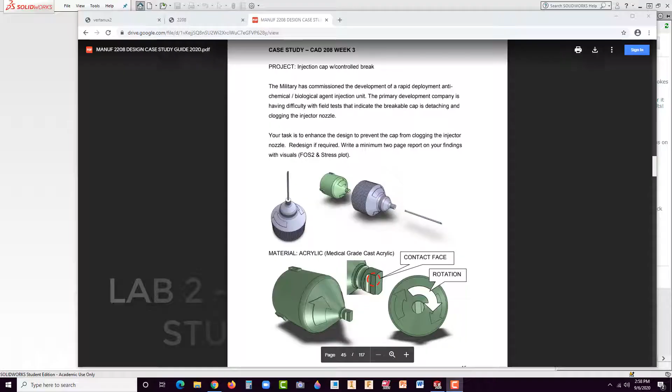Now here, what you see, it's this injector cap with controlled break. And what it is, the military has commissioned development of a rapid deployment anti-chemical/biological agent injection unit. It's kind of like an EpiPen, basically. Now, the primary development companies have a difficulty with field tests that indicate the breakable cap is detaching and clogging the injector nozzle.

That is this part right here. So basically, as it twists, imagine if you were to try and twist that like twisting a knob on a stove. You want to rotate it just like you see here to enable this to break off, and then fluid could get through this little area here. This has a cap on it, just like an injector needle here. Actually, it is a needle, and it lets the fluid flow through. Now what was happening is this little cap here breaks off, and then it clogs inside this unit, clogging the orifice, so the fluids can't flow through, and you can't have that out in the field, all right?

So this is actually based off of a real case study. I changed the parts and the application a bit, so it's different, but it was one that I ran through, and it was really cool, the solution we came up with. All right, so anyhow, let's get started.

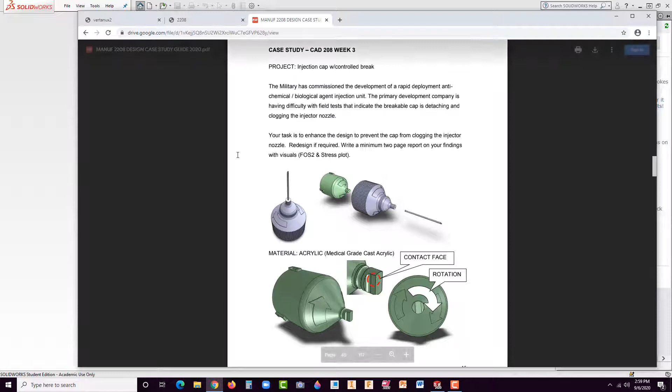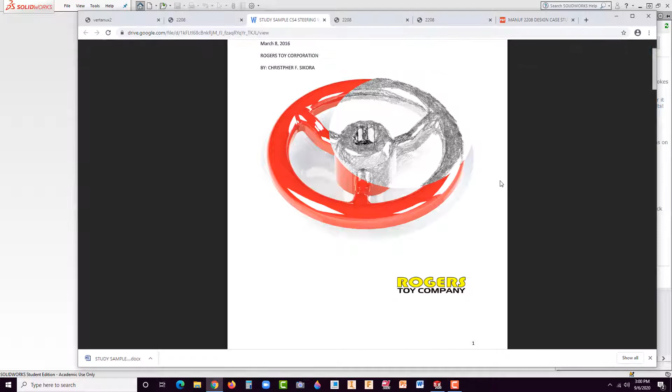All right, and now let's go back here to the 2208, and you'll see Lab 2. That's the files that we want, so go ahead and click on Lab 2, hit Download, and you'll see the injector. Just click on that, and right-click on that folder, and cut it out. I'm going to just drop it on my desktop. Right-click on the desktop, and paste. And now, if we go to the desktop, we'll see the injector, and here are all the parts.

Now, I give you more parts than you really need. Part of doing case studies is to understand what you need and what you don't need. And you don't want to do more work than you have to, all right? Especially when you're doing analysis. So they want us to analyze this and come up with a solution that we're pretty darn sure that's going to work, because this has already been molded and made.

And we want to find the most inexpensive way to fix this design flaw. So you see, injector breakaway head, that's the actual part that we need to modify, and that is the only part you are to modify.

If you really want to change the whole design, you could go ahead, but remember, this is a fictitious design. It's not the original one, so it's not real. It doesn't work like the real part would. So I don't want you really tampering with that. And that's when you go into industry, you have to know to do that too. You don't want to change a customer's entire design, right? You'll get in trouble for that, unless you have to. I mean, if there's really no other way around it, but you have to do some convincing of that, okay? You have to prove out that their design isn't going to work.

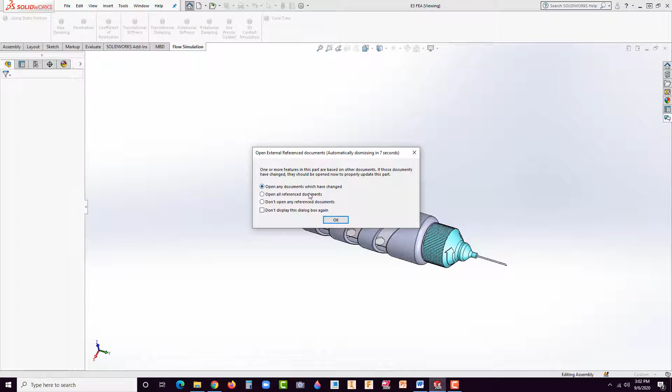All right, but anyway, we'll grab the whole E3 FEA. You can just double click on it. It should launch inside SolidWorks here. And let's see, any changes, just go ahead and hit OK.

And I'm using SolidWorks 2020, by the way.

All right, so here we have, you see it says twist before injection. So this thing twists, but this isn't the part we're editing. But let's go up here and let's do a cross section and see what's going on the inside.

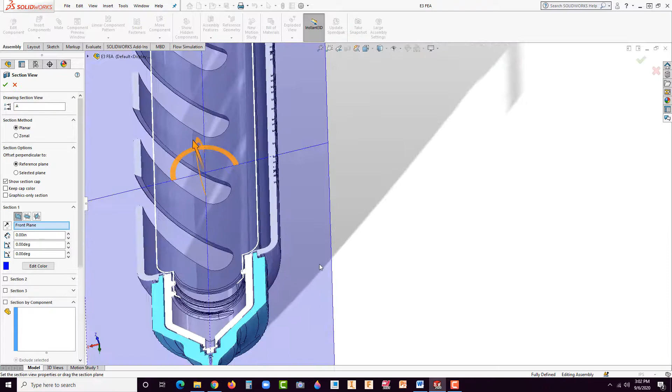As we do the cross section, we could actually see this is the breakaway head. See how this gets really thin here? That's the intent—the design intent is so that it severs and breaks. And then the fluid is in here, and it just makes its way through, able to get through the needle and into the recipient.

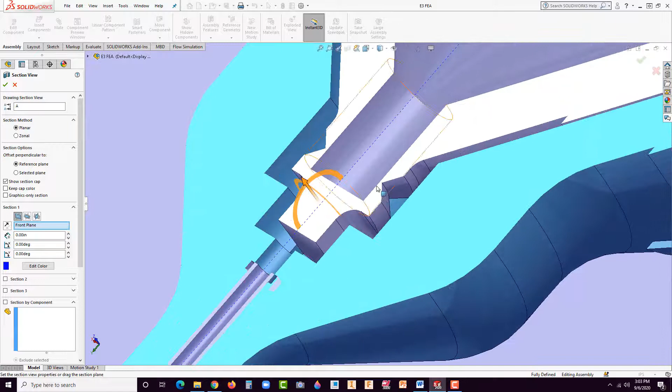All right, now it can't fail. And what was happening is that this head here, even though clearance was designed in, or what they thought was clearance, it was actually twisting or something was happening where maybe it moved forward and basically closed off the whole area, so it couldn't actually make it through.

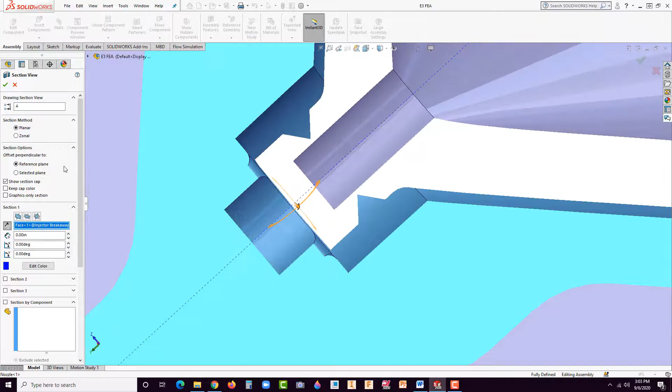So I'm going to cancel out of there. What we can do is we'll hide this—just click on this and hide it. And here you could see there's the actual needle and here's this part.

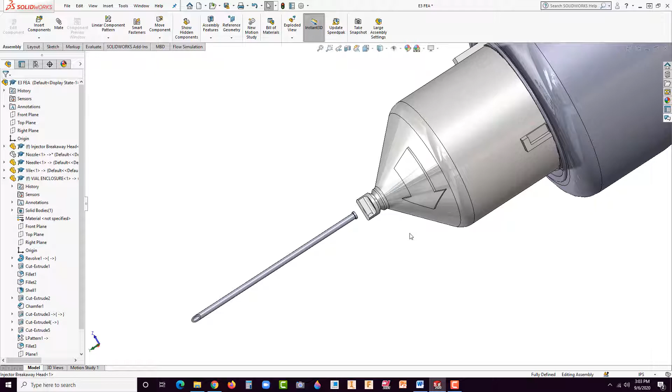Later on we could test it if we want. But we saw we have a very limited area inside there to work with. And we only want, like I said, you want to try and save money, so let's just figure on fixing this part right here.

So let's open that up. Let's right click on it, open.

All right, now I've already put in some features. I did cuts right here. And the very first exercise in the book, which I don't usually go through, I'll let you look at it—it's a split face, and it shows you how to make split faces.

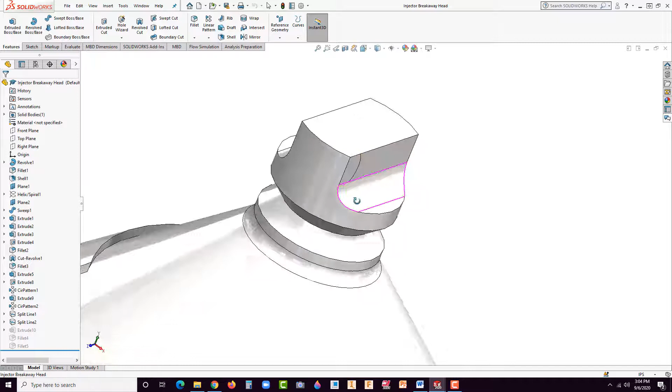And the reason I made split faces here and here is so that you can simulate the twisting effect. Imagine if your finger and your thumb—your finger went right here and your thumb went here—you could actually twist it. See the arrows?

Those arrows are put in there specifically for this lesson. So in real life, those wouldn't be there. Just be aware, I just put those in so I could explain it better. So that gets twisted off.

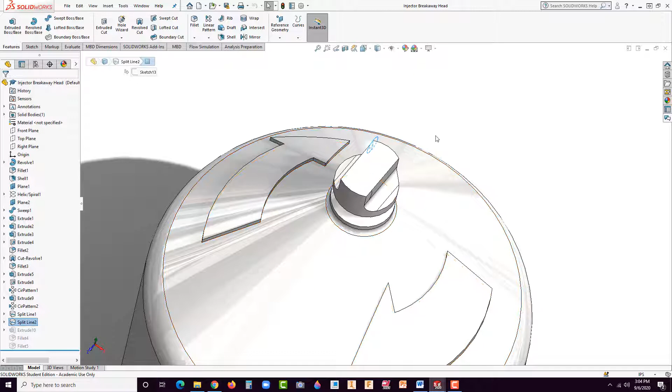But let's try and simulate this. Now remember, we're using the low-level simulation, the free one that comes in every license. All right, so go to SolidWorks add-ins and make sure SolidWorks Simulation is turned off. All right, if it's not there, that's good.

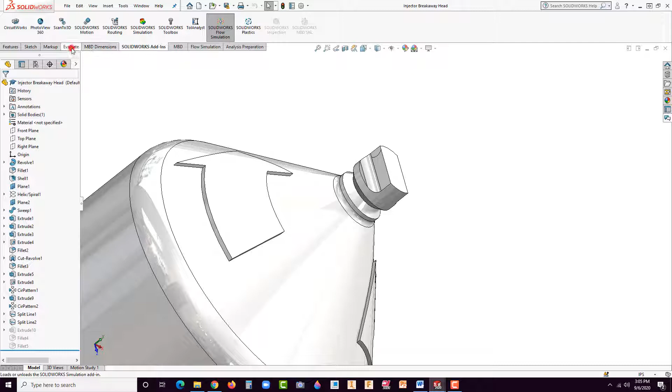Okay, that's fine. Now what you want to do is you want to go to Evaluate and find the SimulationXpress Analysis Wizard. Select it. Now,

over here, see Options, click on Options, make sure it's set to SI and hit OK. Down below, we're going to go ahead, we want to see megapascals, as we did before, so make sure it's set to mmgs.

Sometimes I actually go back to Options—it's weird if you don't. I've seen it come up in PSI, and I don't want PSI in your results. If you give it to me in PSI, I'm going to send it back to you. All right, so hit Next.

And so we can see here the material is already selected, but we'll find out what that is. I'm not sure what that was in there. Actually, it says it's not specified here, but we'll see what's going on.

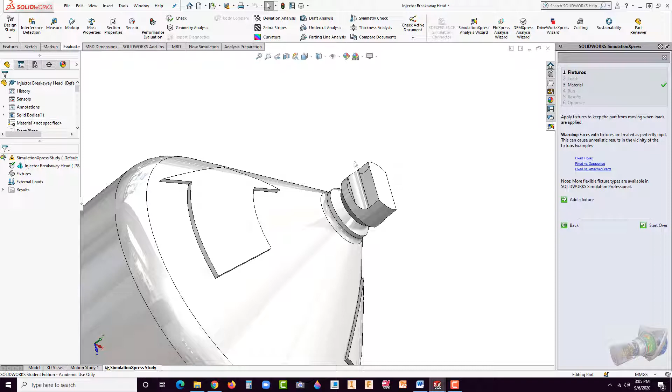All right, so let's first of all add a fixture. Now the fixtures, we could actually make the base here the fixture.

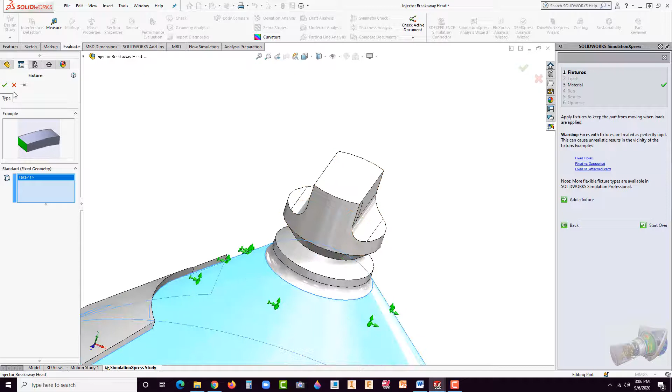So select this face right here. That's what we're considering the immovable object. It could be this too, either way is fine. But we want to really see this get severed. So let's go ahead and hit the green check so that there we have our fixed face.

Now we'll hit Next. Now we have add force and pressure. Now you're probably thinking, hey, wait, this is a torque analysis. Some of you might realize that.

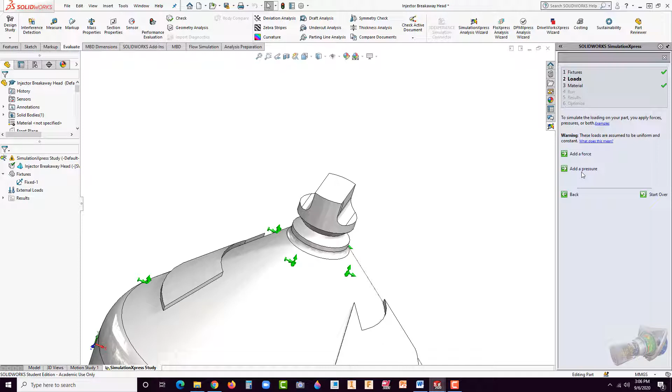It is technically a torque analysis, and we will revisit this in a few weeks using the actual torque tools. One reason I have this is just to show we're going to use the low-level version here, and we're going to apply force on both of those faces that I broke. And we'll get somewhat of an effect of torque here. And I've run it through both, and it actually comes up pretty darn accurate.

So go to Add Force, and instead of SI, newtons, change it to English IPS. Set it to—usually I put it in the case study—so let's go ahead and put in 20 pounds of force.

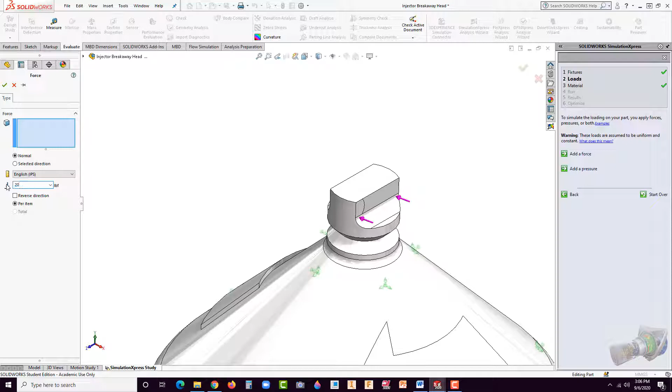And now select this little face here, rotate around, and select that little face there. And look at that, see the arrows? The direction? So the idea is it's like twisting on those faces, just like a knob on a washing machine or a knob on a stove, you're turning it, okay?

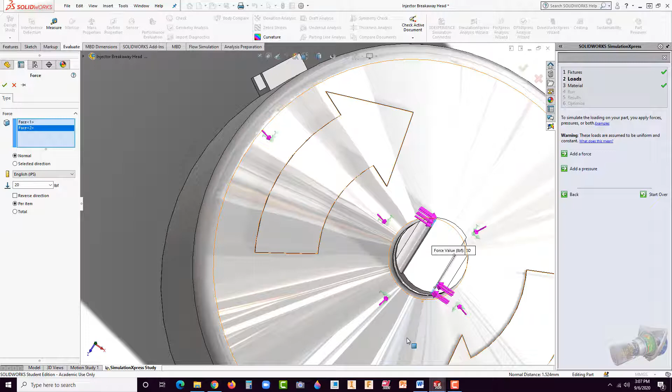And the goal is it's going to sever that thin area and break it so that the fluid can flow out. Hit the green check. Let's go ahead and hit Next. Now, it is already set to acrylic.

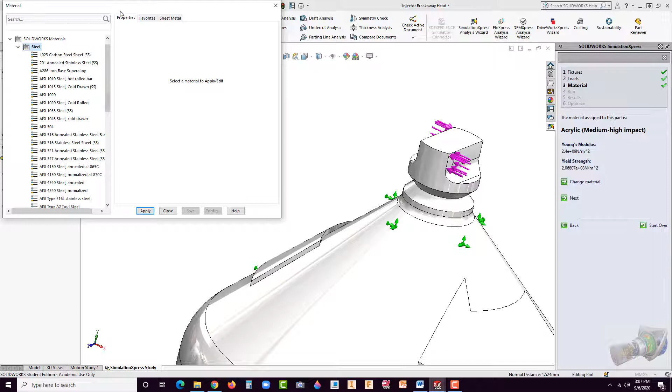I'm going to hit Change Material just to make sure, this might be an older material that no longer exists. Let's go over here, hit the arrow, find plastics, and go with acrylic. The yield is at 45. If you change this to megapascals, or MPa, there it is, 45 is our yield strength.

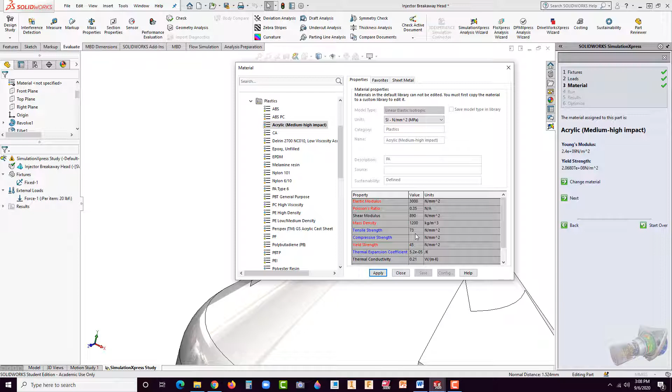So at that point, it's not necessarily breaking, it could be getting really close there. Tensile is actually up to 73, that's technically where we would probably see the actual fracture occur. But yield is at 45. Let's hit Apply and Close.

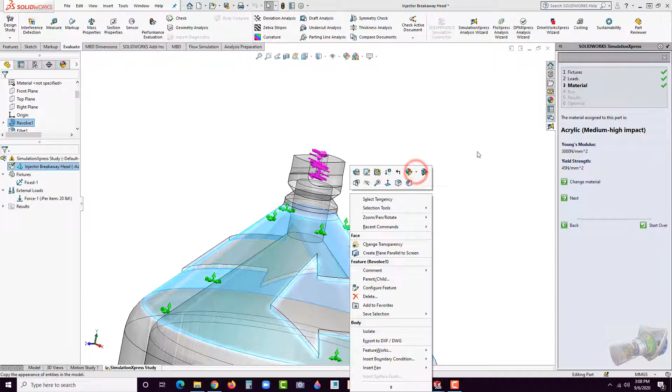Now it turns it to transparency, which is kind of helpful. You can actually see the cutout there and how thin it gets. So the idea was designed to actually sever that area. We could leave it clear, but if you don't like it transparent, you could right click and go to change transparency and turn it off, or select a different material from the list for the appearance, which won't override the actual acrylic material we selected. But we could probably leave it like this and it's fine.

You'll also see some other features, like threads, that take up a tremendous amount of resources on a computer. You might want to right click on those and suppress them.

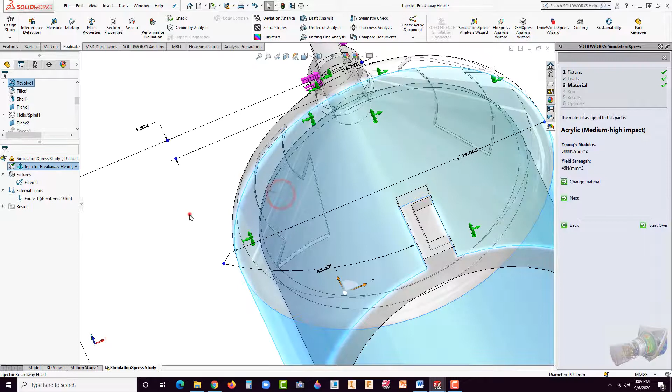Also, if you can't select the surface, try holding shift on your keyboard. Holding shift will allow you to select the outer surfaces here. It's not working for me, why not? Oh, there's a control... nope. Okay, never mind that, let's cancel that.

All right, we should be okay leaving those in. But in real life, you might want to take them off. We could probably find them on the tree and suppress them, but I know it works with them on there, so it doesn't really matter.

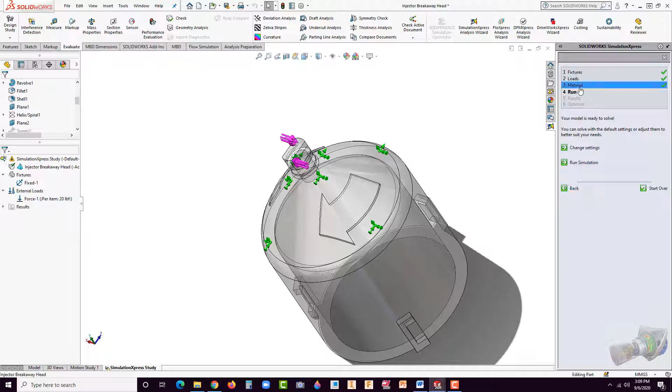Let's go ahead and hit next, and now the only option is run. Hit run simulation, now it's going to break this down into a collection of triangles. This is where it looks a little strange, you see the exaggeration of it, what looks like stretching. Let's go ahead and hit yes, continue.

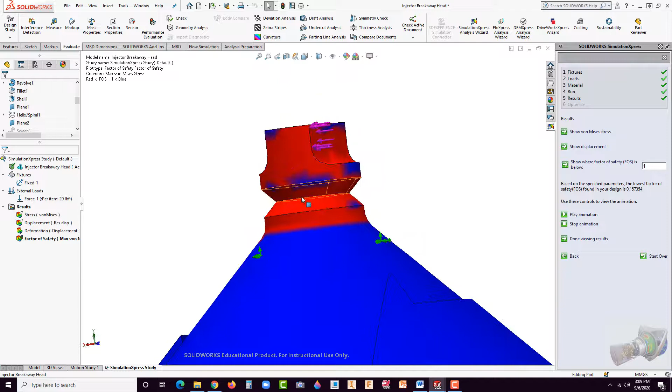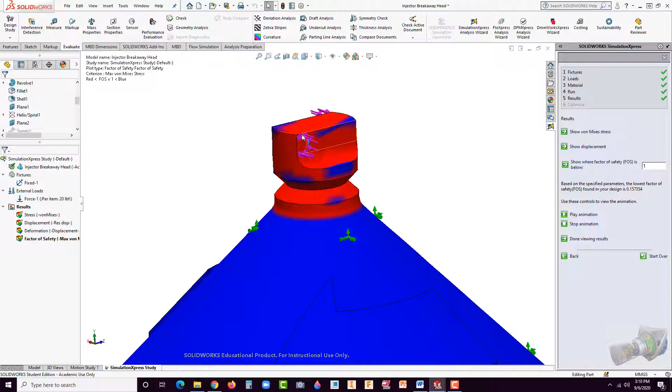Now we can see a factor of safety of 1. We can see the red is clearly there, and the red tells us that it's beyond its yield. But this is binary, so it's like fail or not fail. It's definitely failing, we don't know which area is failing first, but the clue, as I've talked about before, is when you see the marbleized blue, that's usually pretty safe to say it's okay. Here we see red go all the way through. We can't really see a cross-section, but you can see the red inside there as well.

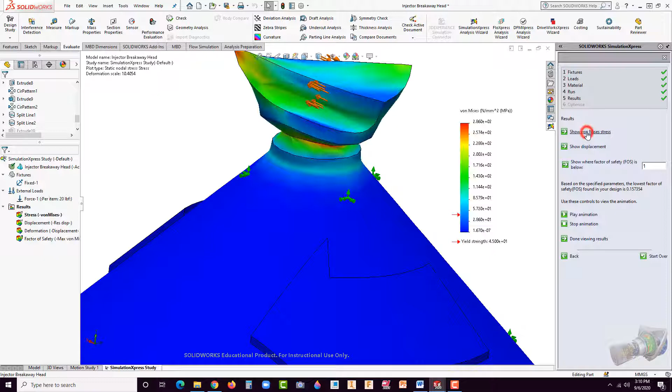Now let's change it to stress, show von Mises. Now here we can see, in megapascals, the yield strength, because it's coming up with scientific notation, it's 4.5, but remember it's really 45. So right here is where we're experiencing it, anything above the blue is hitting yield, going past it.

And what we saw was the tensile strength, we could use that to our advantage too. Tensile, remember, was 71, I believe, and so 71 is right about here. So anything above that is fracturing, and we could see the red, that would be the first area.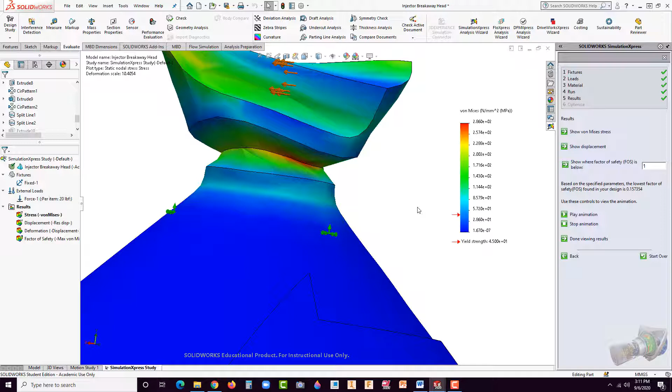So we're good to go, it actually is failing and breaking off, so we want to make sure that part is functional. 20 pounds of force might be a bit excessive too, we might actually only want to do 10, now that I think about it, I might have put the wrong one in there. But we're getting the results we're hoping for, we don't see any red up at the top, we just see it around that area.

So that's good. Okay, show displacement. We learned about this, basically how much is it moving by, and we can see metric here.

Move the decimal place. We're moving about -1, so that's moving less than a millimeter according to that. But this one's kind of awkward because we're not truly using the torque analysis.

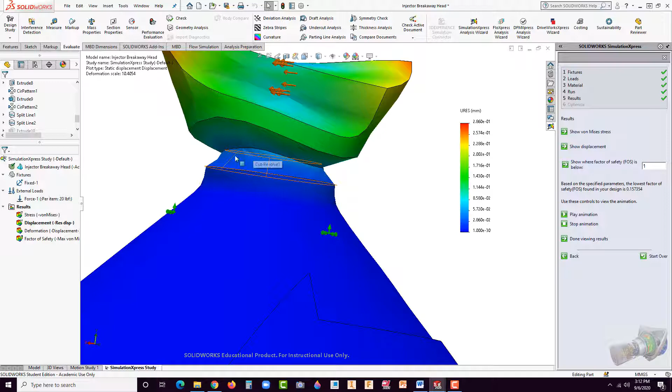What we're interested in though is this severing. Okay, now that we have that, we could actually start taking some images of this. Let's go back to show factor of safety, and we can now take a picture of that. Let's zoom up on it.

And sometimes, see this little box up here? Sometimes I like to have this close in proximity to it, because this is kind of the evidence, so you have a backup of what's going on, like what the factor of safety is. Because if you just sever out the images and crop them, you don't know. So while we have that close in proximity, I just dragged it over.

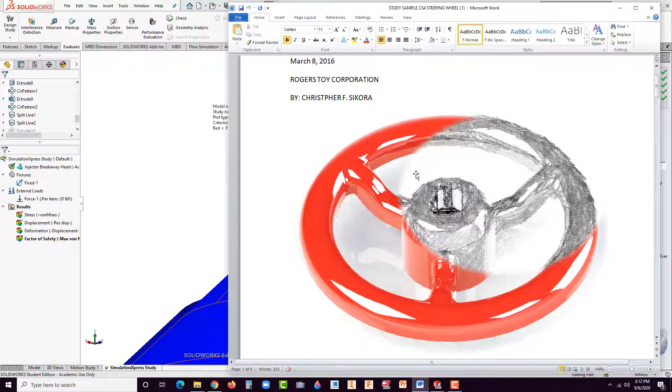It's a little tricky to drag, but now you could hit Alt print screen. And let's go to our Word document that we opened up earlier. Let's zoom out here a little bit and go to 100%. We'll get rid of that image soon here.

First one here, let's see, do we have a factor of safety in here? I actually don't, so we'll make this first one. Steering wheel—actually, it's not the steering wheel, of course. This is the injector break away.

And we'll put in FOS, factor of safety 1. Let's put in a little dash there. All right, and just make sure you put in the date.

All right, now the result: the injector cap appears to break within our yield limit.

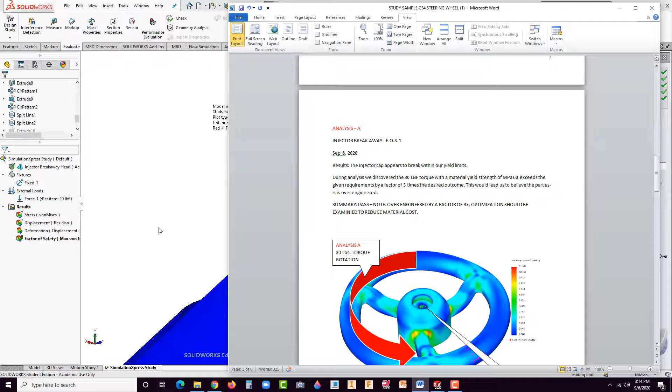Okay, so now that we have that, oh, and actually, you know what, we need to actually test it with the modification. So we really don't need this just yet.

Let's go back down here, go to model, right? At least we have it set up so we could rerun it once we make the change. Now here's the thing—you can make a sketch pad and come up with some hand sketches on what you want to do as far as different concepts. I've seen probably a dozen different concepts over the years teaching this on how to correct this design so we don't want this cap flying off easily or getting lodged into that area like we saw earlier in the assembly. So we need some way to hold it down or keep it away from there.

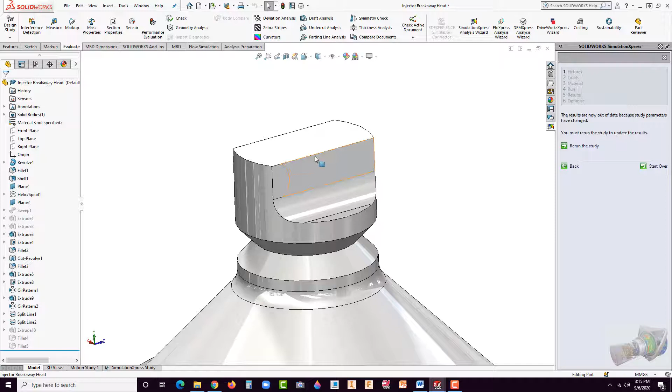Now what I've had is students go in here and draw little bosses so it can't go too far away. But when they take the measurements, I've seen students not measure correctly when you go to the assembly. So let me show you what I mean—let's go back over here and bring in the nozzle, show it, let's go to section.

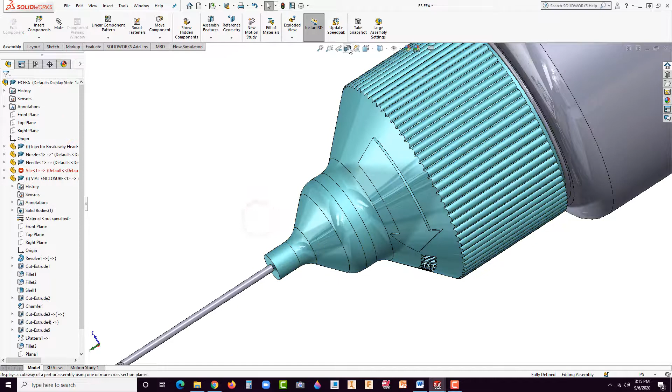Okay, so I've had students right here put in little posts and leave a very small amount, but the problem is if you measure this, there's very little room in there to begin with. Remember, this is really a small part. So to measure it, you go to evaluate and measure, see the little tape measure, and click from here to here. What we see is it's 60 thousandths of an inch. And I've seen people put in 30 thousandths nubs like right in here.

Let's see if we use the markup tool—maybe we could use that. Oh, markup's not available right now. Oh, there it goes.

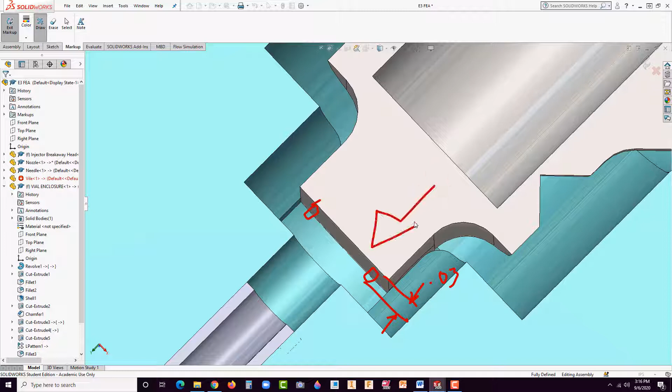So you've seen like little nubs drawn in, sometimes 4, sometimes 2, so it could teeter-totter, which really isn't a bad concept. And then they keep the distance between that at about 0.03, because remember it's 60 thousandths, so they're getting a little bit of clearance. So when this moves forward, it pushes and doesn't seal off this head.

Okay, and remember, you're not supposed to modify this or the needle. I've had students ask, nope, nope, nope. If you've really read through this and you're like, can I redesign it just for fun? If you're into that, absolutely, let me know ahead of time and I'll accept it, because otherwise I need you to focus on this.

All right, so anyways, with that in mind, I've also seen students cut out this segment right here so fluid could flow through, because remember, we're trying to get the fluid through here and around and into the needle as fast as possible.

This is a rapid deployment. Okay, 30 thousandths of an inch isn't exactly a big thing, although needles are very thin, so it's not that big of a deal. All right, so there's a couple scenarios.

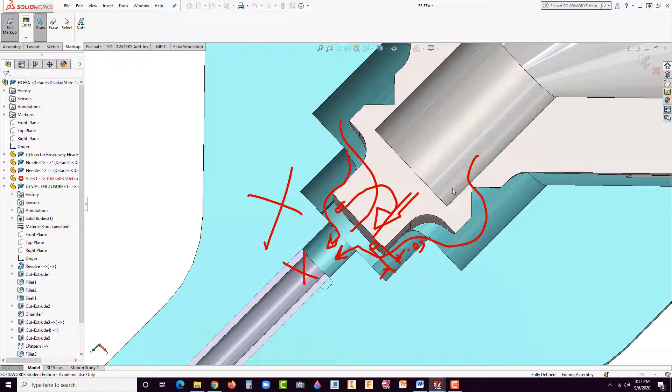Now here's what we ended up doing where I worked. We ended up, to make sure, because were we positive if we put those nubs in or those? Believe me, we thought about those ideas, but none of them felt comfortable putting them in. And you could try those, by all means, feel free to put those in.

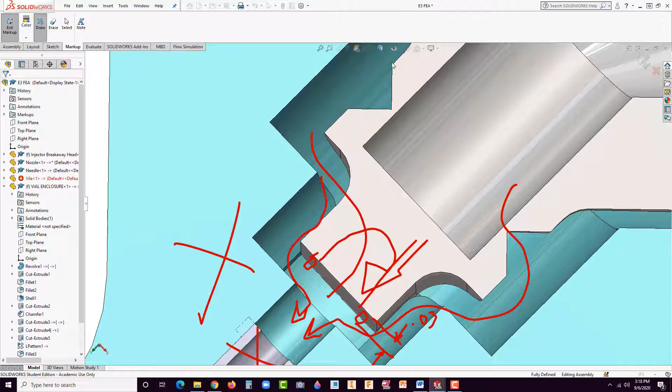You don't have to do much more analysis because that's not going to affect it. And we're not doing a fluid analysis of this either, which actually would be really cool. It's just a little bit higher level than I want to take this class.

But what we ended up doing was putting a tether. Now, a definition of a tether: when you hold a balloon that has helium in it, it rises in the air, and there's a string attached to it - that's basically a tether. So by modeling in this little area, making a tether thin enough - remember, when plastics are thin they bend a little easier versus when they're thicker and bulkier - the theory was that even though this gets twisted off, the tether would maintain its shape. You have to make sure it's small enough to fit in this area.

But the nice thing about the tether - just on one side now, I've had people do tethers on both sides, and I'm like, well then it's not going to really move much, it might actually hold it too close. But one tether is what we ended up going with. So the whole thing tilts and rotates a little bit, and all the fluid makes its way through. Without actually having to really test it in the field, we were able to just come up with that idea, and it worked.

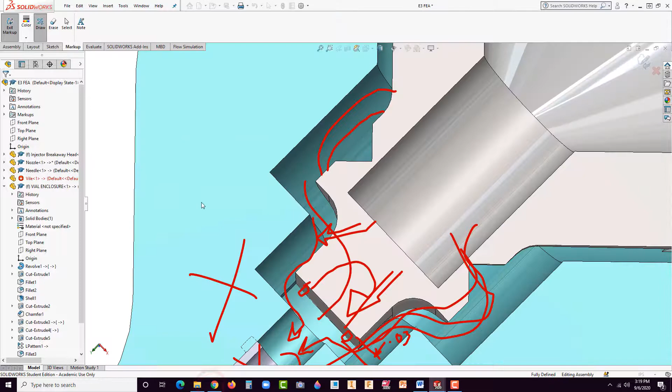So it's up to you. There's 3 different ideas right there. There's other ideas I've seen, but let me show you how you would fix that, how you would model that up. So let's go back to the part.

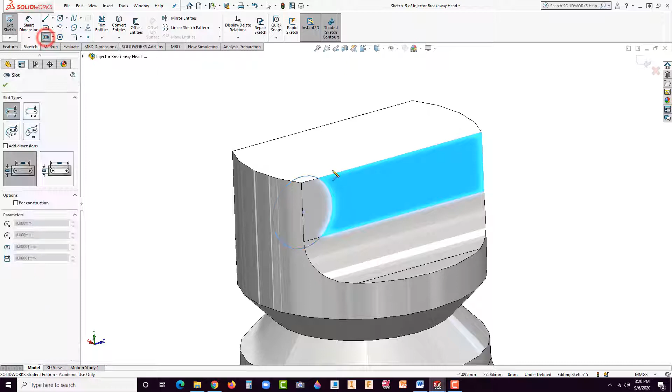Turn off markup. Okay, so Control Tab. So for those of you who wanted to make the cutout, I've seen students do this where they select this face or this face and they draw in a little box. So right here, actually this is what I see most students do - they create a sketch on the side here. And if you want, you could use this, it's kind of a neat little tool, you could do something like that. And then features, extrude cut, through all.

Now here's the problem I've seen students run into with that cutout. When they apply the force to these ends, there's so much removed here, it might actually be snapping this off versus snapping the neck. So be careful of that if you make it too big. I've seen students make it really big, I call them rabbit ears almost, they get so big. I've had students make big cutouts like, no, I want to make sure that fluid flows through there, which is good, but you've got to be careful because it might fracture, break this, or bend it. It might make it too soft where it just bends and doesn't sever the cap.

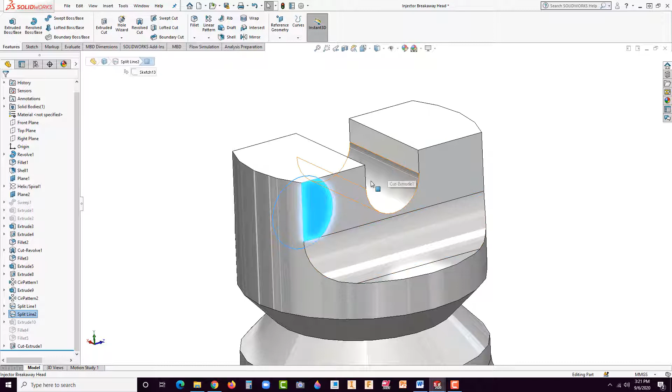So be careful of this design. This is not, to me, an acceptable design. If you want to try it, by all means, I'm not going to be critical. I'll let you know what we experienced when we did analysis, or I'll give you my thoughts. But anyhow, let's look at another one.

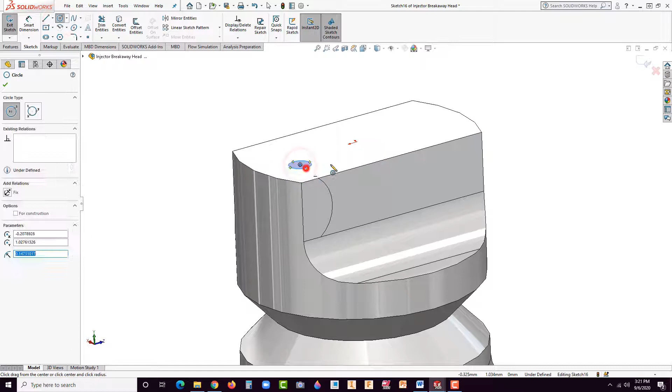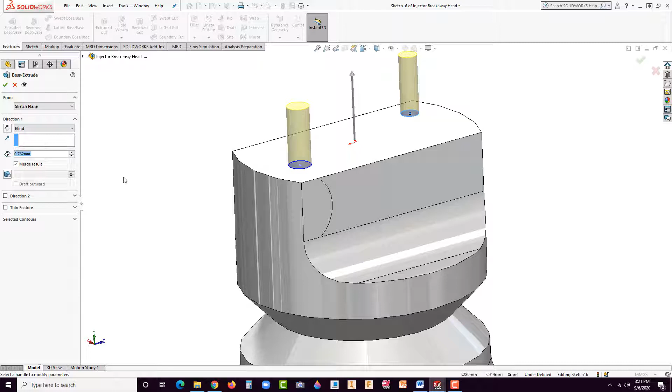Wow, that seems actually quite large. That can't be right, I must have mismeasured something. But anyhow, just be aware that I'm not comfortable at all with that one. It just doesn't seem like it makes sense to me.

When you give me your designs, I'm looking more for your report. Sell me on your idea, sell me on the concept. I'm also looking at the quality of your report, not so much the design. I'll point out some things, but I don't necessarily grade on the design, because you're still learning.

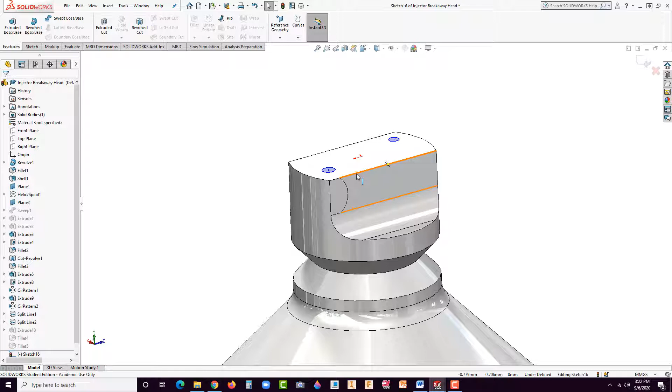I want you to try different things. I will write down where there's error, or maybe give you a second pair of eyes and say, Joe, that might not work. But I'm not going to be critical as far as grading on it. Just make sure you make a good report.

So once you make these changes, let me show you the last one. This is what we did at the company I worked at. We went with the right plane, started to sketch, went to the right view orientation, and it was just this. We took the spline tool, dug it in, and had it come through.

Again, you want to make sure you can verify it later on. Go to extrude, select that geometry. We're metric here, but that's okay, we'll do a conversion. Put in 0.01 IN, so it converts it to 0.254 millimeters.

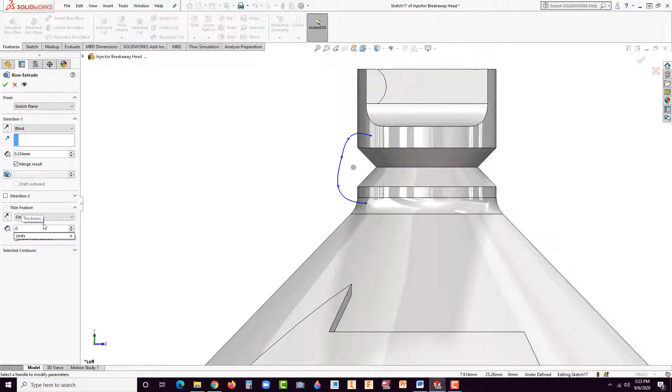Over here for the thin feature, that adds thickness. So we could put in the same 0.254. Now we can see a little tether. We might actually want to make it a little thinner, and also let's have it go mid-plane so it's centered. We'll try that - actually, that might work.

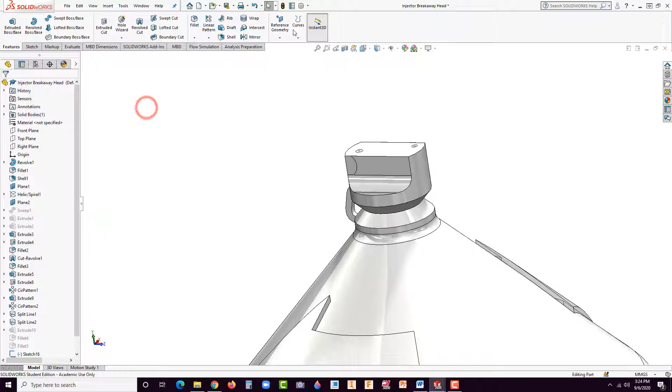Now we could go ahead and rerun the analysis. So we go down here. Once you have this, go back to Evaluate, SimulationXpress Analysis, and go to Next. It should still all be set up. Let's see here, Loads - it didn't remember, so let's go to Add Force. There, and there, and we had it.

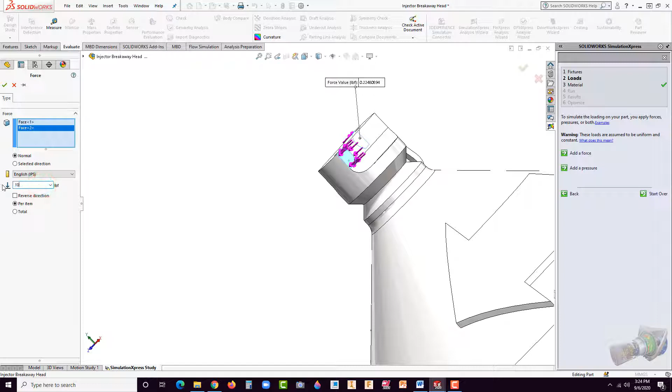Let's change to English and actually go with 10 - I think it's supposed to be more like 10 pounds. Hit the green check. The fixtures, let's add the fixture. Again, select that face there. Hit next, next, Acrylic.

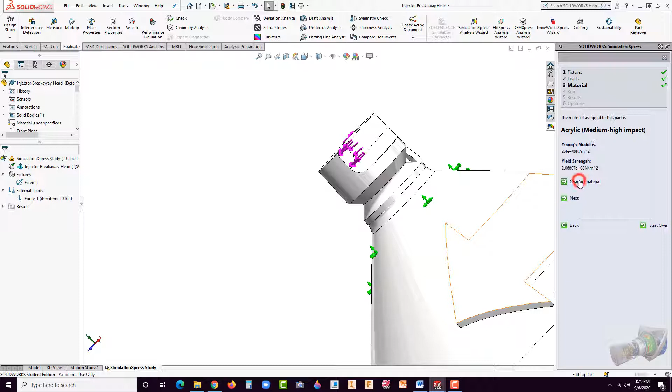I don't trust that one, I'm going to hit change. Again, let's pick that out, that's under plastics. Go with acrylic, apply, close, next, and run it. Hit yes. All right, look at that.

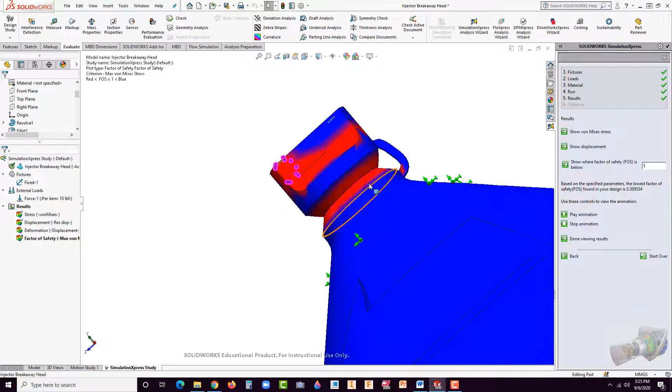And this is what's really cool - look at how it's all bright red in there. We know that's where failure is occurring. Look at this, no red, because it's so thin. So what you would do with this: get a good picture of it, Alt Print Screen, and start dropping these in. So this is the factor of safety.

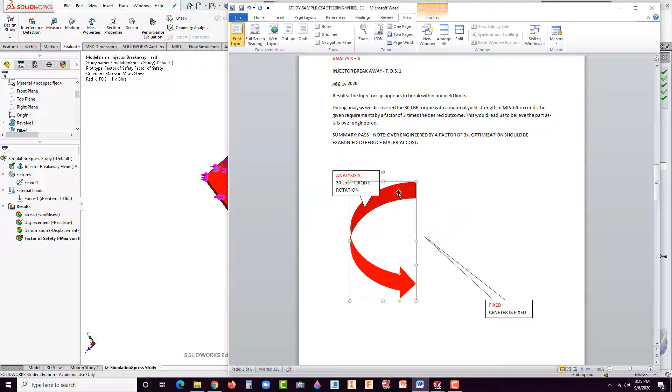Let's delete that - we could leave that in actually. Control V, put this in like so. You could rearrange the arrow if you want to do something like that to show the rotation.

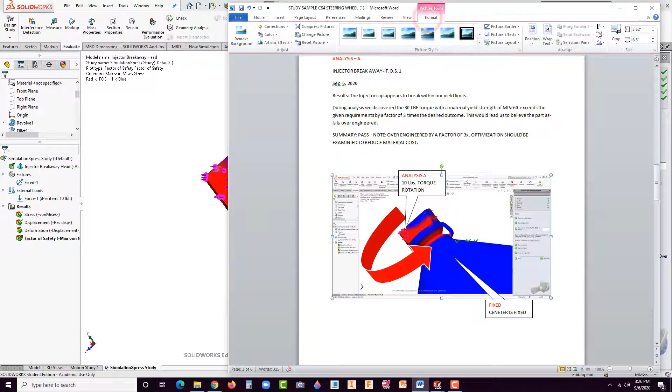And in this case, we put in 10. And fixed - this base is fixed here. And then the torque, we could put it like here. All right, so 10 pounds on there, so you could read that. Remember, there's the ability to crop. You go to Format and Crop. You can crop off this excess.

And I should have done this before I put in all that fancy stuff. Okay, let's click, make it bigger. Let's move that around. And this is still valid right there.

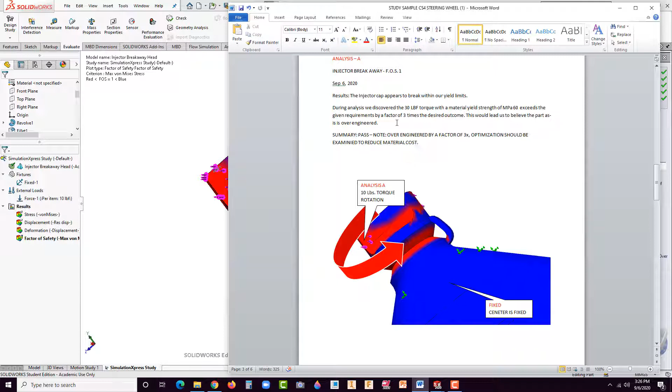That's fixed, okay, so we have that, and you'd want to go through and fix this. By the way, if you don't fix this, I will mark off on it. All right, so just be aware, if you forget to change these, it's going to be marked as wrong. So like here, this 30, make sure you change that.

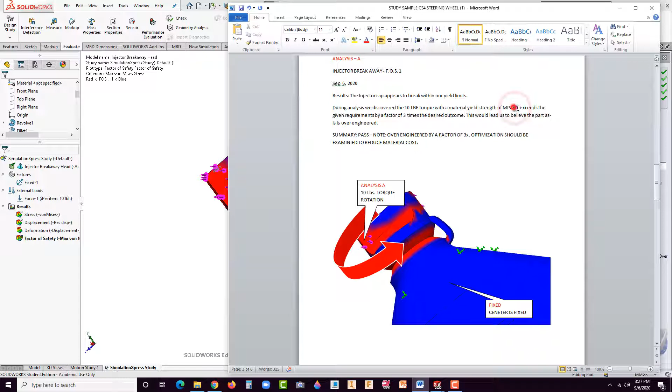Put in any changes, like the yield strength of the acrylic - remember, it's 45, it says 60, so don't forget. All those things need to be updated, and so on and so forth. Then you'd put the other images in here, and that would be it. Now, again, make sure you get a good picture to drop in here. Delete these, change the company name, all that stuff, so it's all valid. And when you send me that report, that's what I'm going to be looking at.